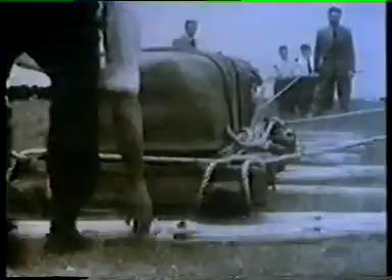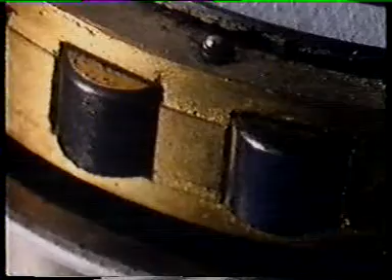The building of Stonehenge may have been one of the first examples of the use of what today are known as rolling element bearings, and these play an important part in engineering. Rolling element bearings, as the name suggests, use a rolling action to transmit mechanical power. The load is concentrated on a small area of contact.

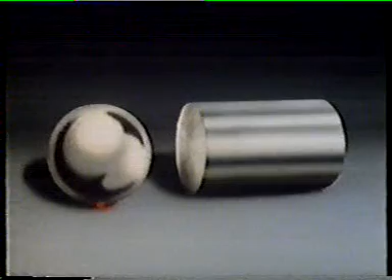Ball bearings make a point contact. Roller or needle bearings make a line contact. The small area of contact produces a high contact pressure, and that's why rolling element bearings are made in hard, high-strength steel with a very smooth finish.

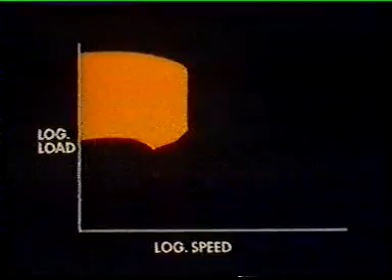As can be seen from the shaded area on the graph, rolling element bearings tend to be used where high loads are running at fairly low speeds. This keeps wear to a minimum. But there are other examples of primitive bearings, again dating from the dawn of history.

When the Egyptians began building the pyramids, they were faced with the same problems as the architects of Stonehenge: how to move massive blocks of stone as efficiently as possible. Each of these stones is as high as a man. It's thought that they devised an equally ingenious system to that used by Stonehenge man.

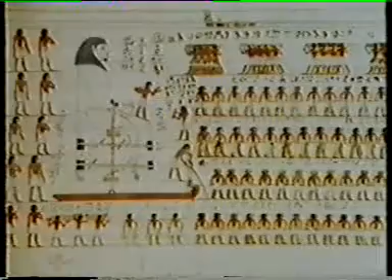This Egyptian mural shows a colossal statue being dragged along on a sledge. The figure at the front can be seen pouring a liquid under the runners to act as a lubricant. This idea is very similar in principle to the plain bearings in use today.

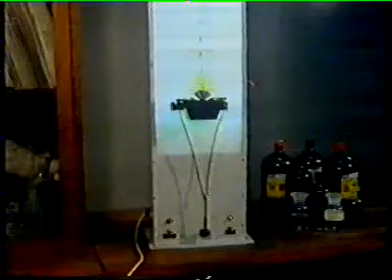Plain or journal bearings are normally used to house or support a revolving shaft. In most cases, a lubricant is essential, and this plays an important part in the operation of the bearing. We can use a model to show how the lubricant works. Normally, the shaft would rest at the bottom of the bush, but to show the way it works more easily, we've turned it upside down with the bearing weighted down onto the shaft.

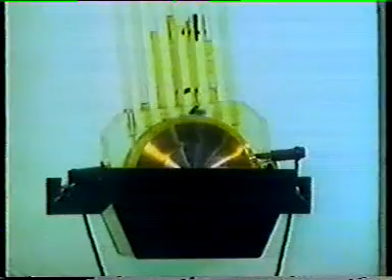When the shaft rotates, it draws the oil round with it, forcing the shaft to rise, so cushioning the shaft. The pressure generated causes the oil to rise in the tubes. If we take a closer look at what happens, this time the right way up, you can see the shaft at rest in the bottom of the bearing.

As soon as the shaft starts to rotate, the oil next to it is pulled along with it. However, there's no gap for the oil to go through, so a pressure wedge is formed. It's this pressure that eventually forces the shaft to rise and float on a cushion of oil. We call this hydrodynamic lubrication.

We can't ignore the friction set up when two surfaces rub together, especially when a shaft is starting and stopping frequently. If a bearing is to work as efficiently as possible, you have to be very careful as to what material you use.

In this standard milling cutter, you can see that the vertical force from the cutting edge is resisted by the yoke which holds the revolving shaft, or arbor. To prevent excessive friction between the arbor and the yoke, it's fitted with a well-lubricated phosphor-bronze bearing. Although brass would be cheaper, there are certain problems associated with it when it's used as a bearing material.

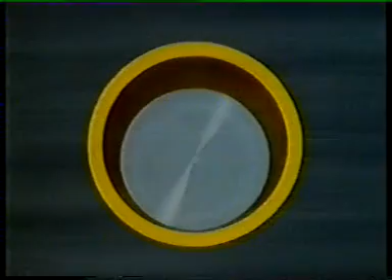For example, if you do use brass, as the shaft stops and starts, you can see that minute quantities of the metal are transferred from the bearing to the shaft. These particles would eventually build up and cause the shaft to seize. It's the tin in the bronze that gives it the edge over brass. The tin, reacting with the oil, forms a soapy complex, and this imparts a microscopically thin extra layer of lubrication to the bearing. This hinders excessive wear.

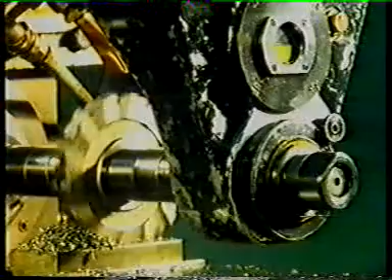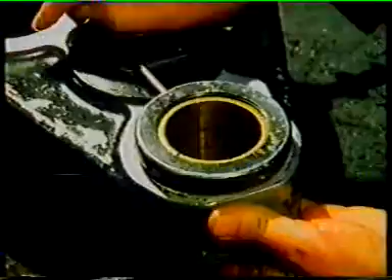The phosphor bronze bearing used in this milling cutter is a split bearing, which not only allows the oil to circulate, but also means that any wear can be compensated for by tightening the thread. So you always have a tight fit, and excess vibration is virtually eliminated. You can hear what a badly fitted bearing sounds like. And you can see the ragged result. This is known as chatter.

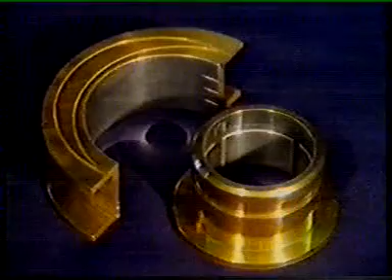As well as having a low coefficient of friction, ideally a bearing should possess the best possible resistance to fatigue. Shell or thin-walled bearings are particularly well suited for the job. A strong mild steel backing is coated with a thin layer of leaded bronze or some similar material. This unites the strength of mild steel with the superior bearing properties of the coating material. These shell bearings are also quite cheap and easy to make. The mild steel backing can either be in strip form or tubular.

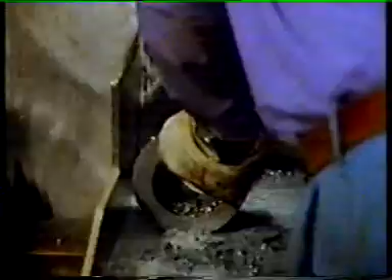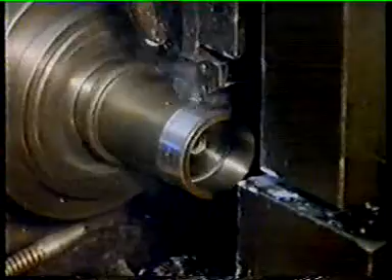Once the required length has been cut, the tube undergoes a number of machining operations. These prepare the inner surface and the outer rim for the coating process. Before coating, the bearing is whitewashed on the outer surface. This prevents bearing material from being deposited where it's not wanted.

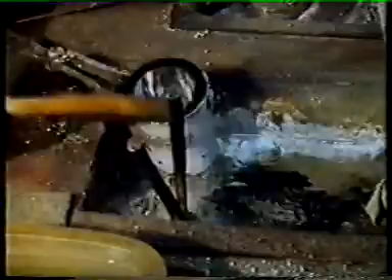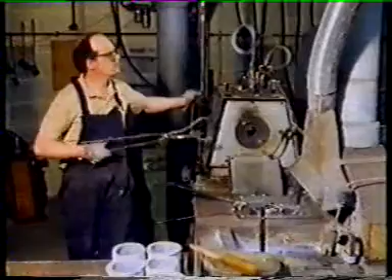The coating is applied by centrifugal casting. First of all, the tube is dipped into a solder, which will help the coating to adhere more easily. Then it's clamped inside a rotating cylinder into which the molten bearing material is poured. In this case, it's a white metal made of lead, antimony, and tin. As it spins, the bearing material, assisted by the centrifugal force, coats the inside of the tube evenly and solidifies on cooling.

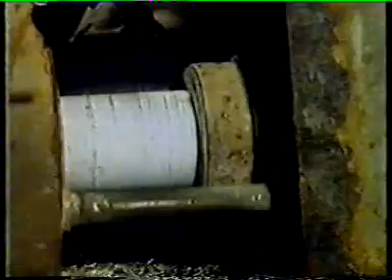This process can be used for a whole range of white metal or Babbitt bearing materials based on tin and lead, with small additions of antimony, copper, arsenic or cadmium, as well as copper-based materials, the choice depending on the conditions under which they'll operate.

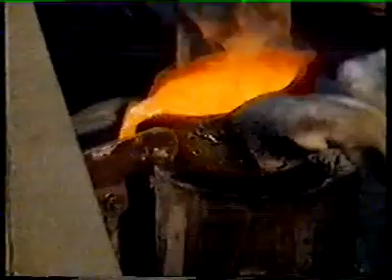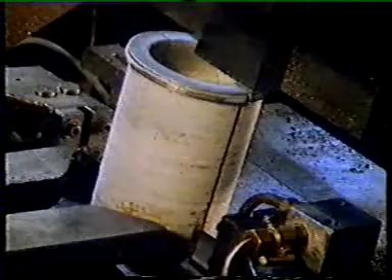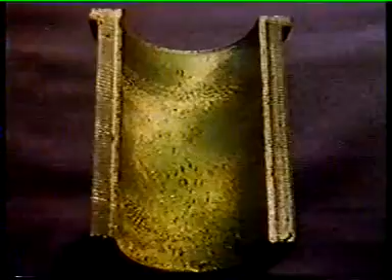Shell bearings are either used in one piece or split to make two half bearings. These would be used together in a final structure, but it might be difficult to fit a single bearing. At this stage, the bearing surface is still rough after its centrifugal casting, and it's got to be machined to the right size. This is done in several stages. First, the surface is rough machined to remove surface impurities.

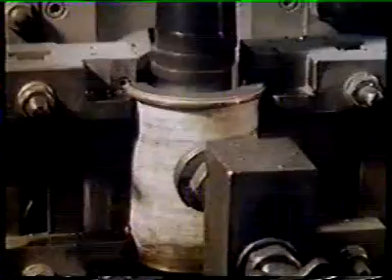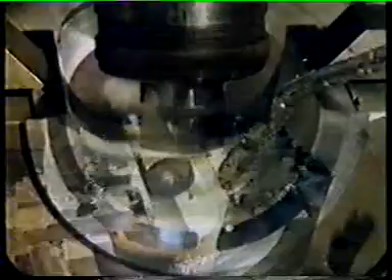Then comes any additional machining. Oil grooves, for instance, which are cut into the bearing surface. This is a job which has to be very carefully carried out, as any irregularity in the oil duct could weaken the final performance of the bearing. Last of all, a fine finish for the bearing surface. This is done by fast machining, and the finished bearing is ready for use.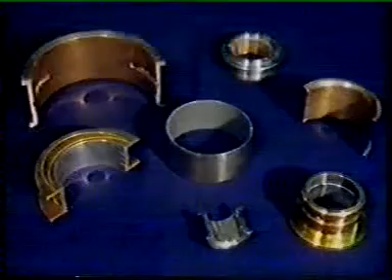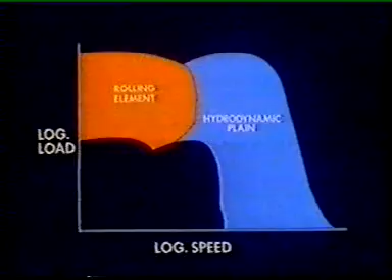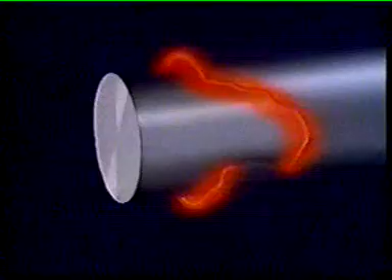Thin-wall bearings come in a range of shapes and sizes, some with a thrust face, some without. As with other hydrodynamic bearings, they tend to be used for light to medium loads at high speeds. All these soft metals have a low melting point, and if an oil failure causes a rise in temperature, the white metal melts and runs out of the bearing. A loud knocking gives ample warning of bearing failure, and the bearing can be stopped before any damage is done.

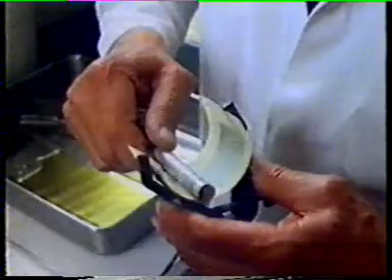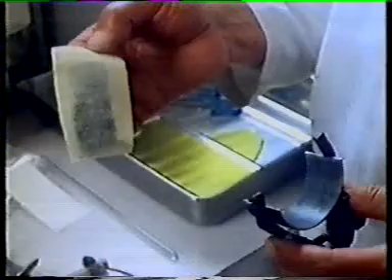An advantage of these bearings is that when operating in dusty conditions, the soft coating absorbs dirt particles, which otherwise might cause the shaft to wear excessively or seize up altogether. If you chemically treat a well-used bearing so that the ferrous debris shows up, you'll be surprised to see just how much there is. It shows up as the purple areas on this roll of paper. This kind of contamination is quite common and could have stopped an ordinary bronze bearing if allowed to build up. Babbitt metal has a number of uses and is ideal for big ends and main bearings in cars and lorry engines.

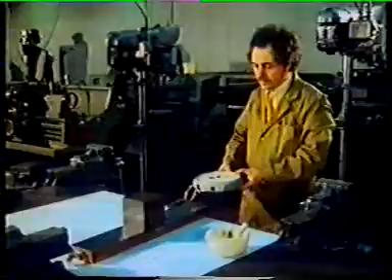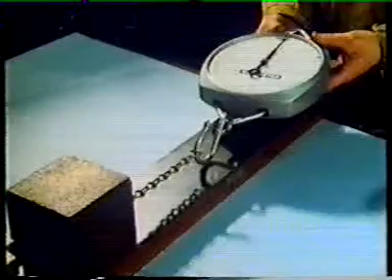Some materials other than oil have a certain amount of lubricative properties. The dry bearing properties of graphite, for example, are simply demonstrated. If you pull a heavy metal block along another metal surface, you can measure the force needed to drag it along. Now watch what happens if you add graphite powder to the flat surface. You can see that much less force is needed to pull the block along.

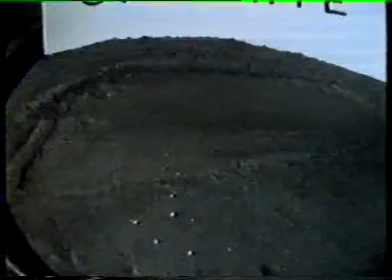This friction-reducing property of graphite is used to great advantage in the production of porous metal bearings. These also contain their own built-in reservoir of lubricating oil. Porous metal bearings are formed by the process known as powder metallurgy. The ingredients are stearate, copper, tin, and graphite. The copper and tin form the bronze base, while the stearate and graphite assist the lubrication. The powders are weighed to a predetermined formula and then thoroughly mixed.

The powder is fed into an automatic press, which compresses it in precision dies. The particles of powder form a sort of metallic sponge. The amount of porosity depends on the pressure applied. Here it's around 185 newtons per square millimeter.

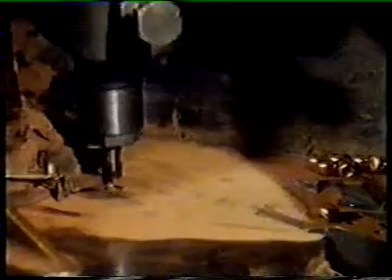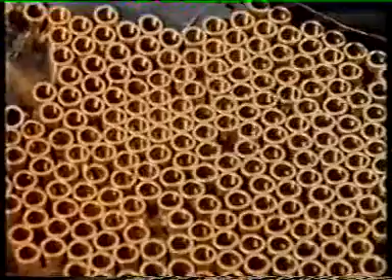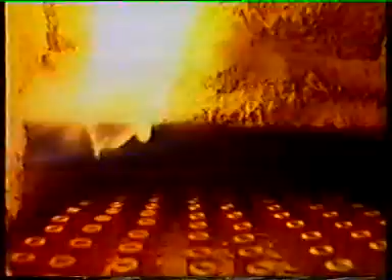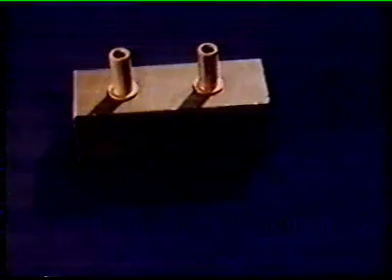At this stage, the porous compacts are quite fragile, and they have to be sintered to alloy the copper and tin. This welds the particles together, forming a porous bronze structure of the required shape. The transformation takes place in an atmosphere containing hydrogen at 800 degrees centigrade. That's well below the melting point of bronze. The result is a tough, porous structure able to withstand relatively high loads. Before sintering, the powder compact can easily be broken. After sintering, it's much tougher.

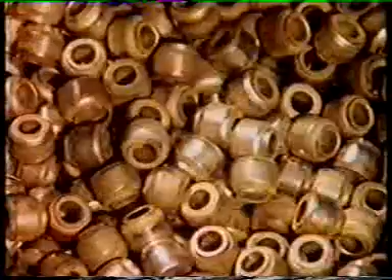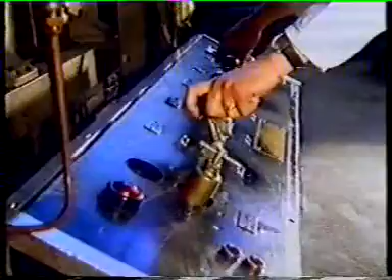After they've been sintered, the bearings are sized. This ensures that any distortion that may have been caused by the high temperature sintering can be rectified. Next, the bearings are placed in a vacuum chamber. When the vacuum is formed, all the air trapped in the porous structure of the metal is extracted. The chamber is then filled with oil, and the metal draws the oil in like a dry sponge would draw in water.

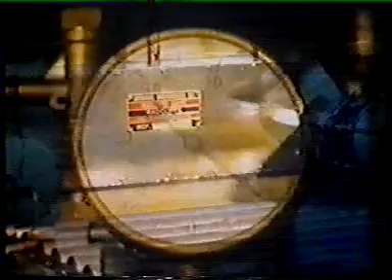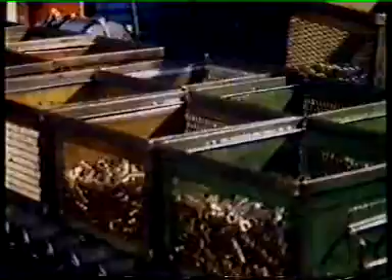The bearings, when they're removed from the chamber, will be steeped in oil. As much as 35% of their entire volume will be made up of oil. The oil content can be quite easily demonstrated. If air is blown into the bore of this bearing, the oil foams out.

In practice, a small amount of oil initially escapes from the surface of the metal. The rotation of the shaft then draws more oil from the bearing. A pressure wedge is formed, which lifts the shaft. At the pressure zone, some oil is forced back into the pores of the metal, and recirculated to the unloaded area. When the shaft stops rotating, most of the oil is reabsorbed from the clearance by capillary action.

Obviously, the life of the lubricant itself is vital in this type of bearing, which is ideal for use at low to medium loads in the medium speed range. Use a bearing like this in a starter motor, and it should last the life of the car, without any need for additional lubrication.

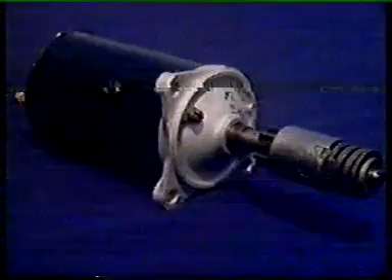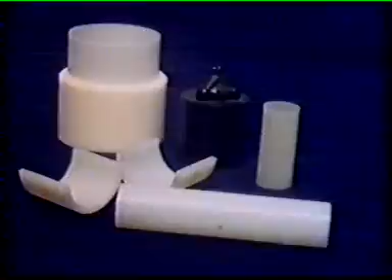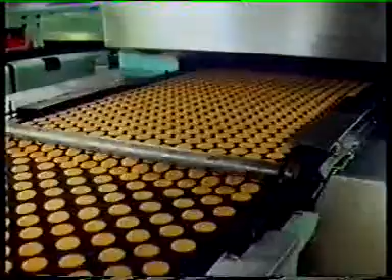A nylon bearing is the best substitute when the use of oil is not permissible or possible. Most processed foods are produced using highly mechanized or automated equipment with many moving parts and revolving shafts. You wouldn't want oil getting in your ice cream or biscuits. Nylon is the ideal substitute. It's a dry bearing material which needs no lubrication, although its performance is improved even if it's only lubricated with water.

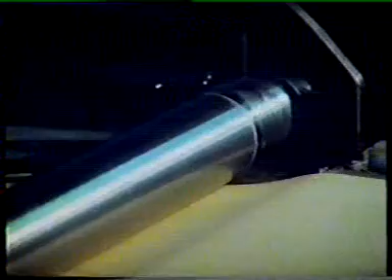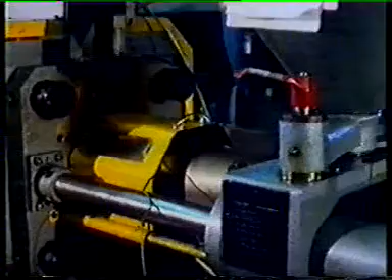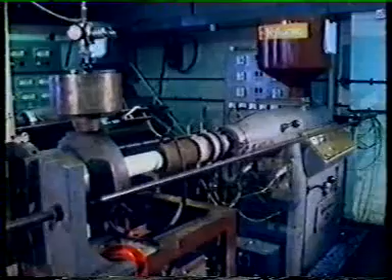Nylon and other dry bearings work efficiently under light or medium loads. They resist abrasion and chemical attack, they're non-toxic, and can be used continuously at temperatures up to 90 degrees centigrade. The smaller bearings are produced ready for use by injection molding, a quick and efficient process. For larger components, the nylon is first extruded to form large bars of the appropriate diameter. These are then machined to form the required shape of bearing.

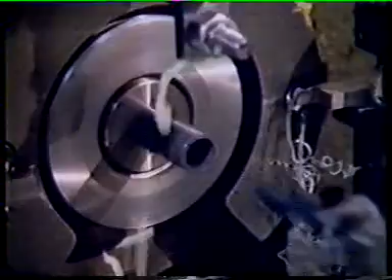A drawback with nylon is that it readily absorbs moisture. This can be inhibited by the addition of fillers like graphite, glass fiber, and molybdenum disulfide, which apart from turning it black, gives it increased resistance to wear and the ability to operate at higher temperatures. As with other non-metallic bearings, nylon tends to be used with a stainless steel or mild steel shaft, some of which are often chromium plated.

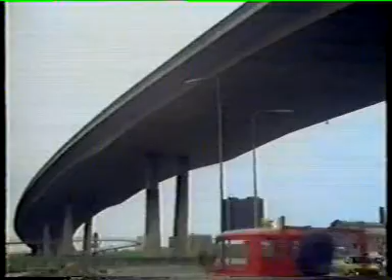Materials used in bearings can pop up in the strangest places. This fried egg wouldn't slide around the pan as nimbly as it does if the pan didn't have a non-stick coating. Polytetrafluoroethylene, PTFE for short, plays an important role as a dry bearing material. It's particularly useful in the building of bridges. Bridge bearings on the top or bottom of bridge supports allow for expansion and contraction, which can be up to 12 inches between the hottest and coldest day of the year.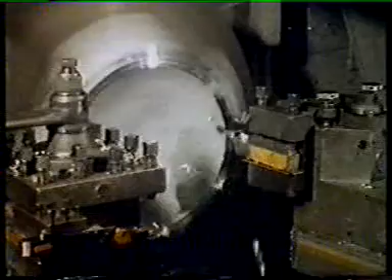The main part of the bearing is made of a steel alloy which is carefully machined to the utmost accuracy. This concave part will house the PTFE. The ridge, machined round the rim, ensures that it's accurately aligned. The bearings come in a variety of shapes and sizes, and all are given several layers of protective paint to ensure that they'll stand years of pollution and weathering.

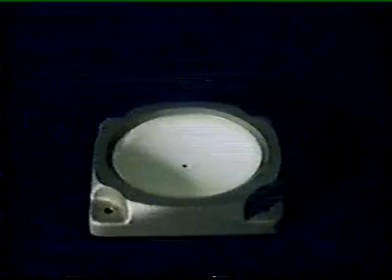The bearing allows movement in all directions. There's a bottom concave piece coated with PTFE. Onto this fits a convex disc of anodized aluminium alloy, a surface which will move easily over the PTFE. On top of this is placed a plate to which stainless steel has been bonded. It's this part which will be attached to the top of the bridge support when the bearing is in place.

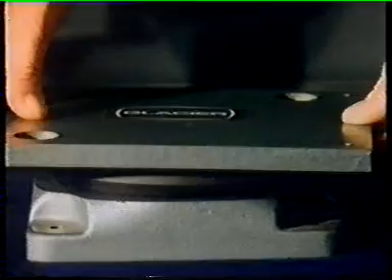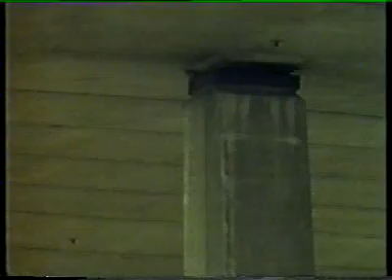A problem with PTFE, as any owner of a non-stick pan will know, is that it doesn't last forever. So pure PTFE is seldom used to house a rotating shaft.

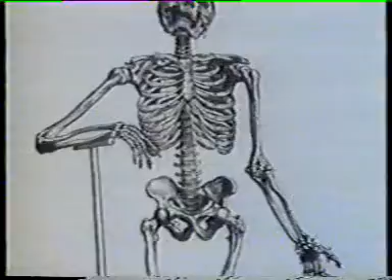Our own bodies are full of bearings. If for one reason or another they wear out or start malfunctioning, many of them can be replaced by spare part surgery. The creation of artificial hip joints is perhaps the most exciting way in which the engineer, by copying nature, has brought relief from pain to thousands and thousands of arthritis victims. The hip joint at the top of the leg is a very beautifully made ball and socket.

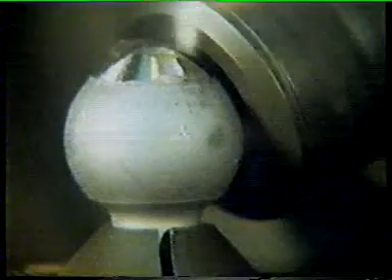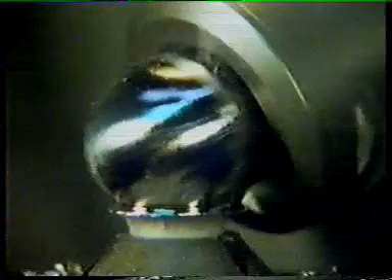These days, with so many new materials to choose from, the ball is made of a cobalt chrome alloy. The initial rough shape is cast, and there then follows a complex milling process. This machine rotates in 3 dimensions to shape a perfect spheroid surface. The next few stages are crucial, the polishing or linishing to give as perfect a finish as is humanly possible. The polishing is carried out with progressively finer stones until the job is done.

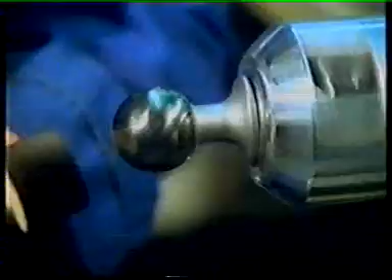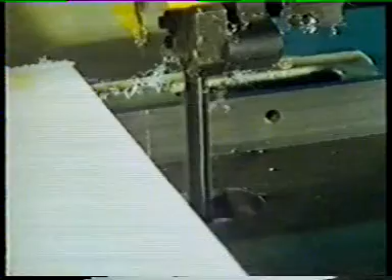Nowadays, the socket is made of a plastic material known as a high molecular weight polyethylene. This is one of a range of plastic materials with valuable bearing characteristics. It's formed in blocks, and after settling for several months in the dark, it's cut into strips. These are then placed in a center lathe and turned to produce a circular rod. The material is quite difficult to machine as it tends to pick up static electricity and stick to the lathe.

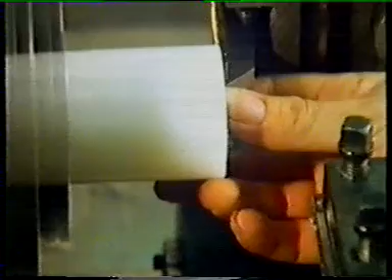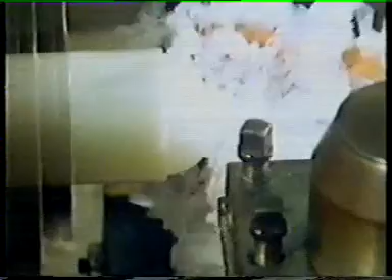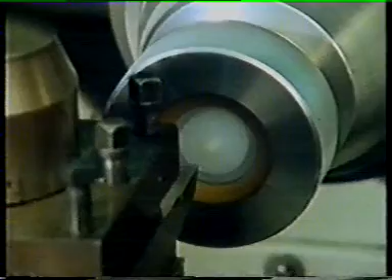The next operation is the machining of the back of the socket. The geometry is important, as this will eventually hold it in place. Placing your hands near a lathe in this manner is not normally to be recommended, unless you're a highly skilled operator. The inside of the socket is very carefully machined to ensure the best possible finish. Finally, a thin wire is pressed into place so that the prosthesis can be seen if it ever needs to be X-rayed.

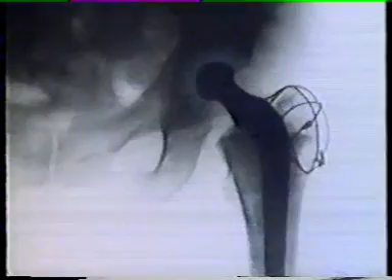When the finished parts are assembled, they demonstrate excellent bearing properties and when implanted in the body, work as well as a human joint and last as long. So, whether you're moving an ancient monument or afflicted with a wonky leg, remember, the choice of a correct bearing is vital.